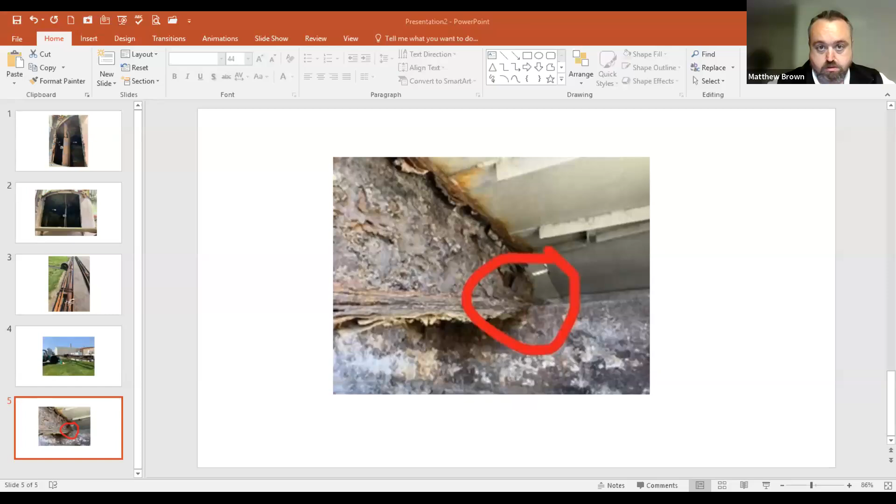If I could share my screen real quick, I will show you some pictures from these projects. Let's see if I can. Sorry, I'm starting. Here we go.

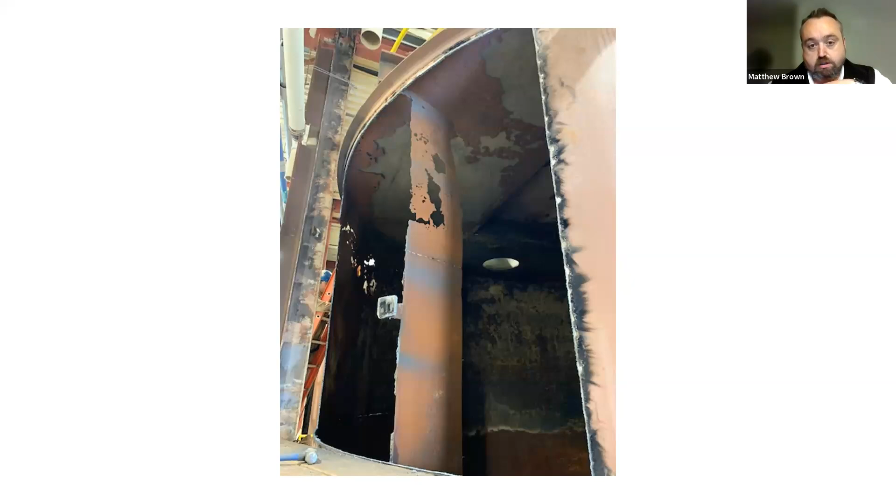So we talked about a blend tank, sludge blend tank project. We've talked about that off and on for about a year now, because when we originally planned on coating these tanks, the people that were sandblasting blew through the side of them. If you look at this picture here, you can see the holes in the side of the tank, and this is a large piece. They began construction last week on repairs. They cut out a large piece, and you can see on the inside some of the support beams need to be replaced, as there's holes and corrosion throughout. So these are some pictures of blend tank number 1.

Another project we have going on is final clarifier number 1. What you see here are the large skimmer arms that skim the fats, oil, and greases, or scum as we call it, off the top. They're being sent out for much needed metal repair and powder coating, and then they'll be reinstalled once we get those back. It's about a 2 to 3 week turnaround.

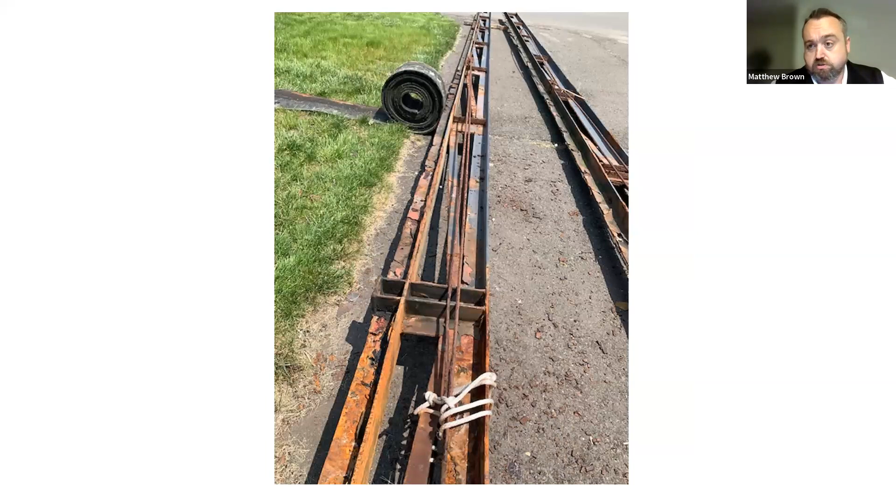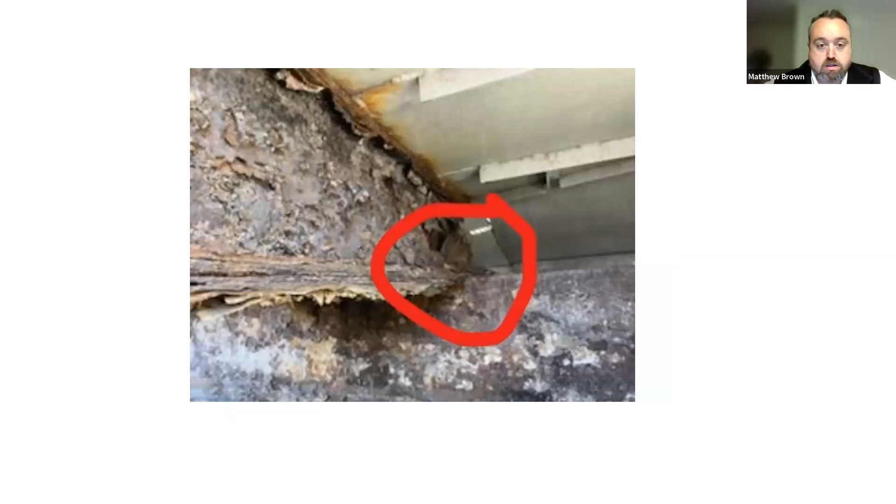One of the other large projects we spoke about is the West Gravity Thickener. These gravity thickeners handle our primary sludge. Both of them are having some major issues, so we are currently operating out of one. What you see here is a large beam that basically holds up the entire structure, and because of the age of it and the corrosive atmosphere, you can see that beam on the inside is resting metal on metal, so the moving parts were no longer moving. That repair is underway, and we expect all these repairs to be finished by July 1st. So with that, I don't have much else for the contract operations.

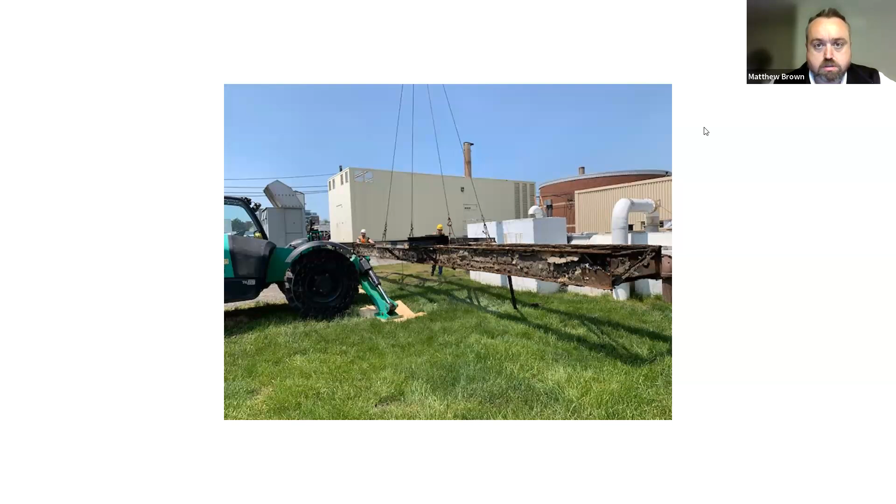No questions. Let's move on to reports.

The first item under reports is the fiscal year 22-23 revenues and expenditures munis report. A copy of that is included, if there are any questions on that.

No questions. Item B, discussion on sanitary sewer billing for fiscal year 23-24.

WPCA staff plans to have a final file completed later this week for the tax collector's office for the sewer billing. First District Water and SNEW provide their water data, and we continue to incorporate that into our sewer tax manager software, doing quality assurance and quality control to make sure the billing is as good as it's going to be for billing purposes. That's been ongoing.

Item C, discussion on WPC engineering projects. Item 1, the water pollution control facility plan update. The team, Veolia, WPCA, Veril, we've all reviewed a preliminary draft report. We've been reviewing sections along the way and providing all the comments back to Arcadis, and they're working on incorporating those comments into a final draft report.

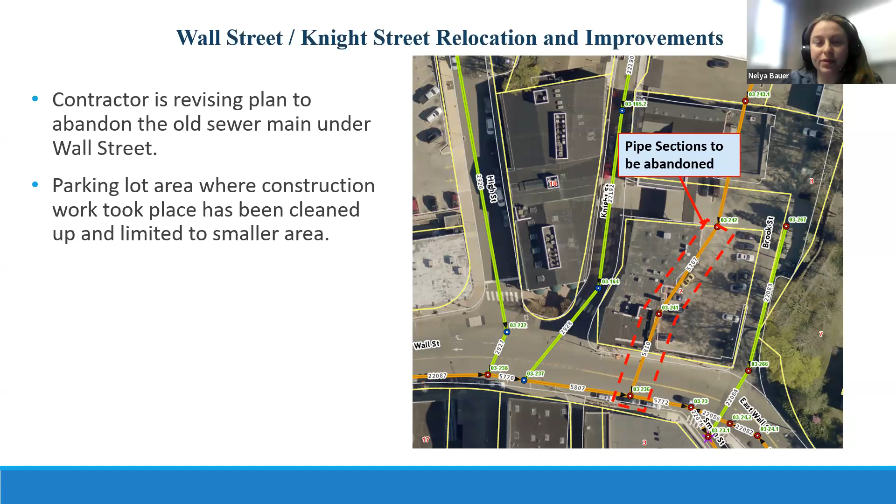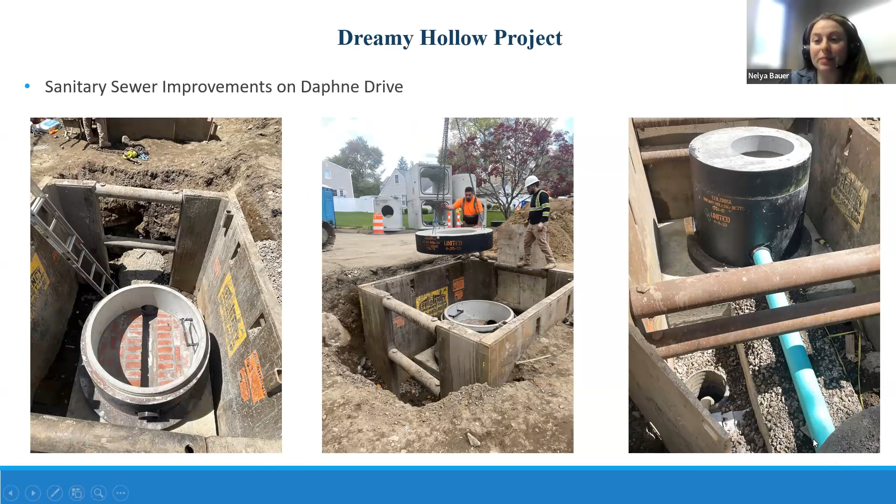On the pump station projects, we have updates on Karen Drive and the Woodward Avenue pump station. On Karen Drive, the work has been completed, which included architectural, mechanical, and electrical updates in the pump station.

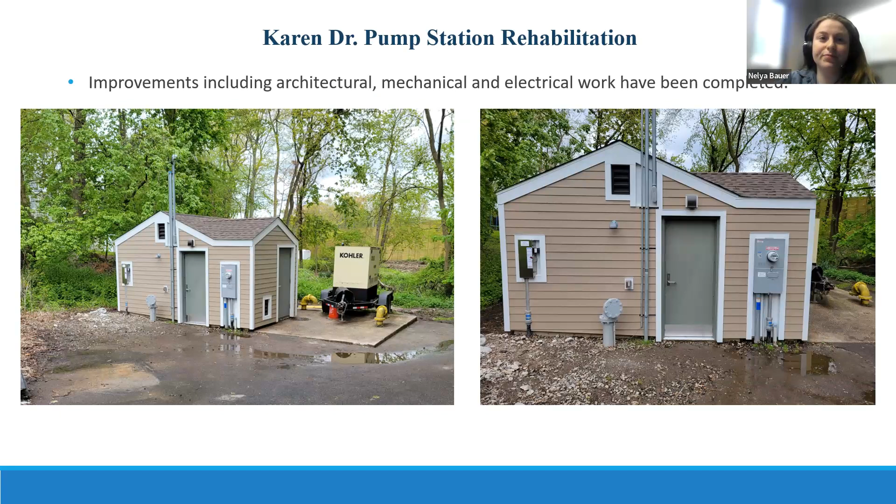The contractor is in the process of cleaning the pipe segments, so that's 90% complete. Next, they'll be submitting a bypass plan to bypass these pipe sections to complete the lining. In about 2-3 weeks, we'll know the complete schedule, and it'll be 1 full day's work to complete the lining.

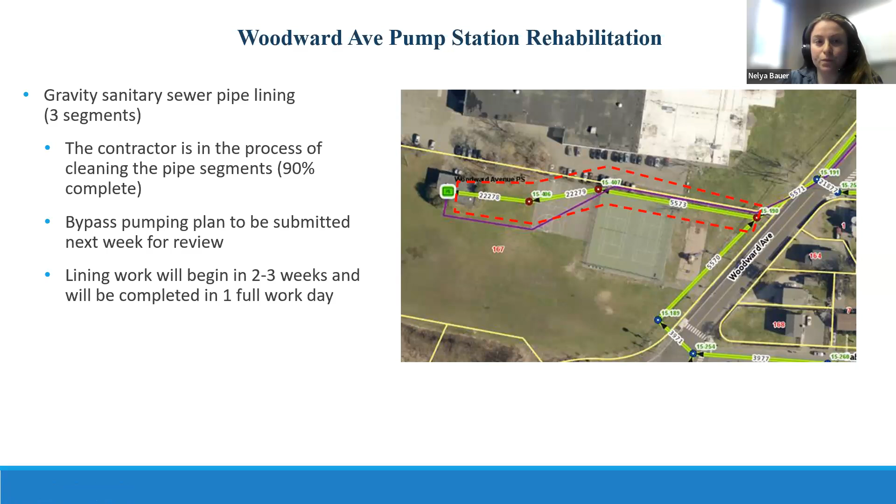We also have our SCADA Phase 3 upgrades currently in progress, which include new chemical flow meters, filtrate wet well level instrumentation, and new instrumentation in the scum tank, which includes a level indicator, mixer, and pump.

Here we see the new chemical flow meters that have been fully integrated into SCADA. This is the flow meter for the sodium bisulfite metering pumps, and the 2 flow meters for the sodium hypochlorite metering pumps.

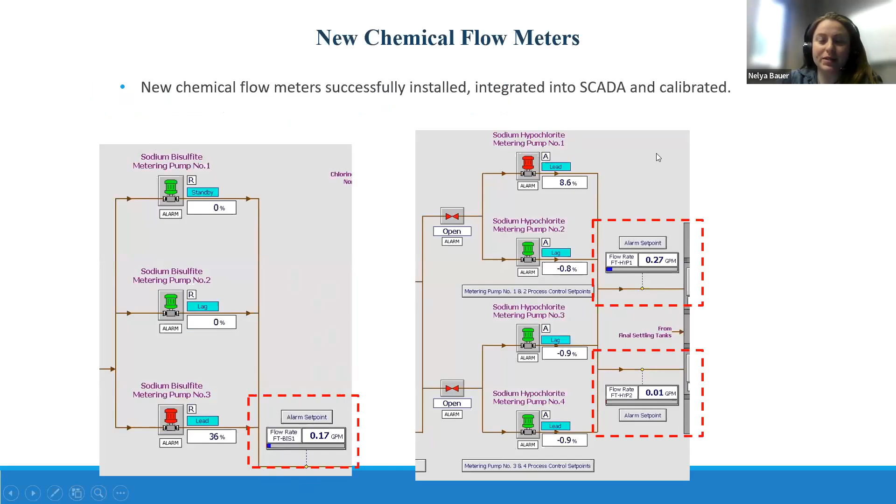On the filtrate wet well, we have a new level instrument shown here. You can see the level within the tank. There's also a low and high level alarm that's integrated in SCADA on this tank.

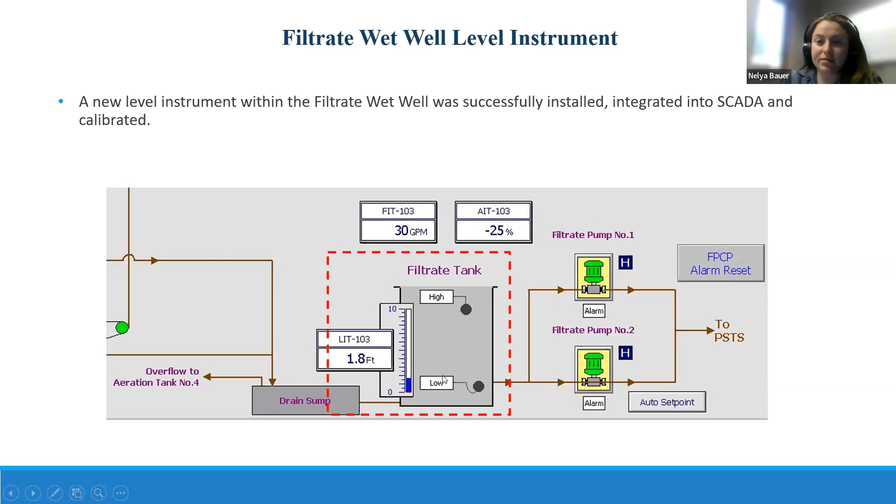We also have new instrumentation on the scum tank that's fully integrated into SCADA. Here we see the level indicator within the scum tank, and also a new submersible mixer and new submersible pump.

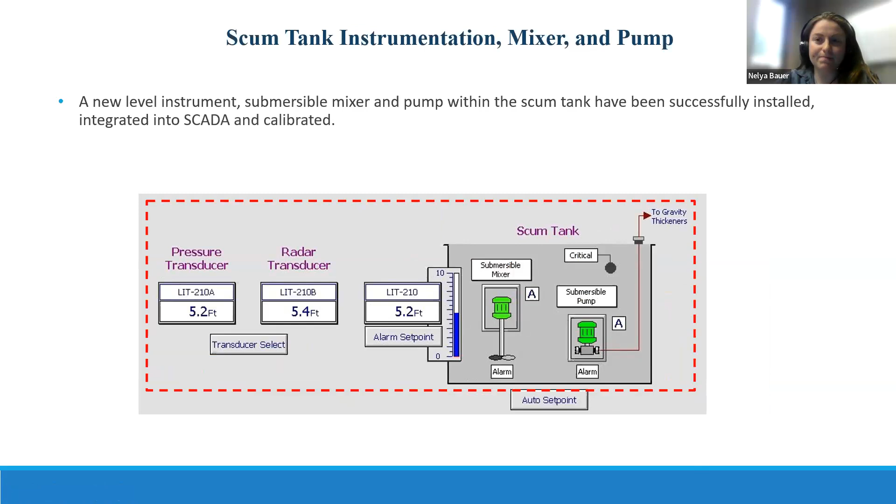So those are the updates on the capital improvements. Thanks so much, let me know if you have any questions.